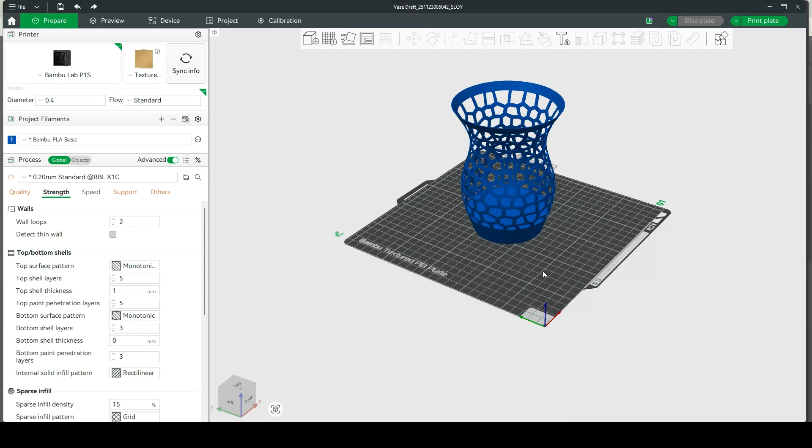In this video, we're going to be talking about Bambu Studio's Make My Vase tool and how you can create something like this in just a matter of minutes. Let's jump right in.

Jumping right in, we're going to head on over to our Home tab and then down to MakerLab. As we get into here, we're going to scroll down and find our Make My Vase. This tool is awesome for creating simple and even some more complex style vases.

Now we have two options. We can either start from a blank or we can even find a template that works for us. We're going to use this create from blank, and we're going to go over some of the features that you're going to need to know as you're getting into this tool.

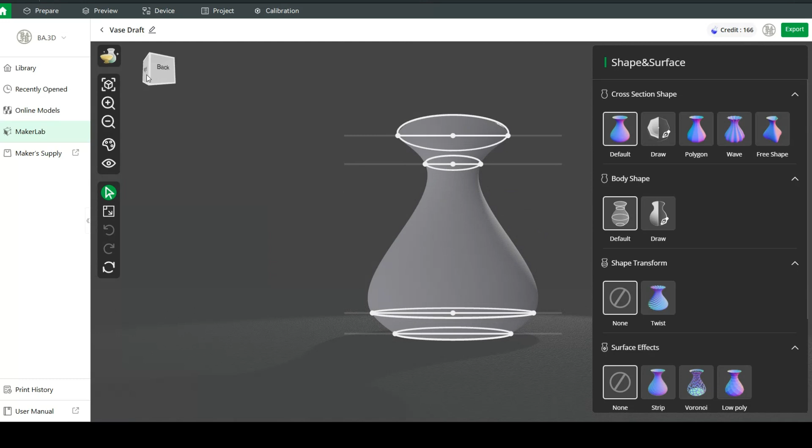So by default, this is what you land in, and we're going to just do a quick preview of the vase that we have here. If you've ever used any design tools, some of this stuff's going to come very natural. If you have not used any tools, then it's going to feel a little clunky at first.

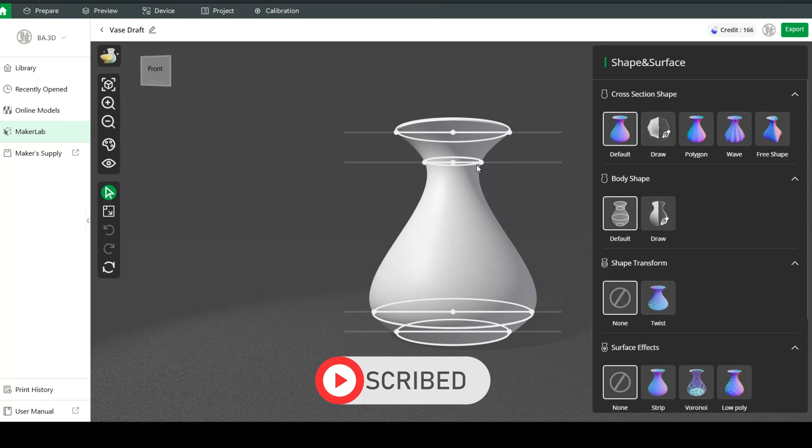As far as the settings go, I like to start by getting the height first. You have the option to expand, and you have the option to contract, and then you can also move these sections up and down. In order to move, you have to just make sure you're on one of the little handles, or else it won't let you just grab here in the middle if you're having that issue.

So we're going to first set the height. I know I want to set this at around 6 inches in height, so I'm going to start at 150 millimeters. I know it's not exact, but in my brain, it's easy just to go by 25s to get it close.

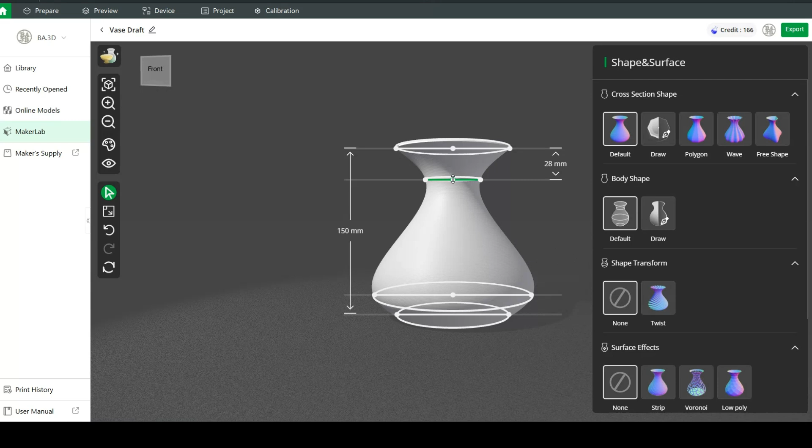Okay, the next thought process here is we need to decide what type of vase we want to create. I like to use these sections here. Draw is if you want to actually draw your own style vase. So we're going to go through each of these.

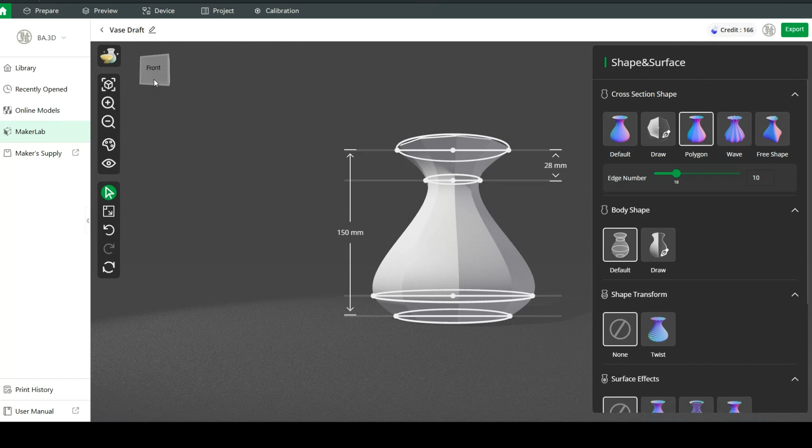So your simple polygon here, that's what it looks like, top, bottom. And you can increase or decrease the number of edges. It's totally up to you.

And then we have a simple wave. This one gives us a few more options in the fact that we can decrease the quantity. You can see I'm on a straight here, and we can increase the amplitude a little bit, and it really stretches them out a long ways. So you can play around with this, build it how you would like.

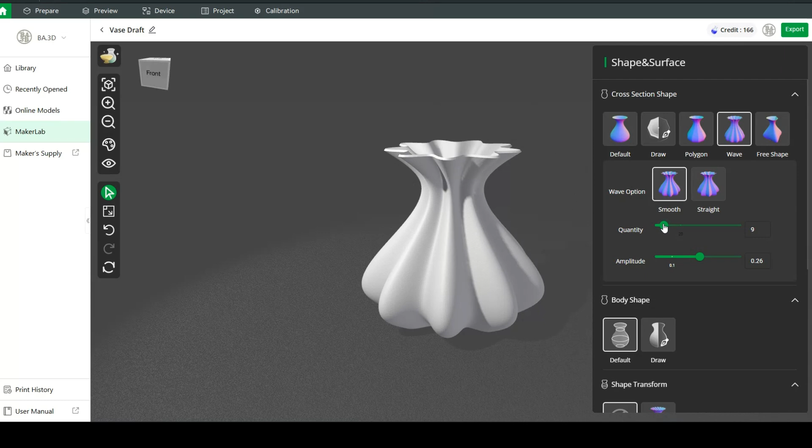There's also the smooth option that you can play around with and really build out some fun stuff. So that's the wave. And then you have the free shape, and the free shape is a little bit of, it's not quite as free as you would like it to be.

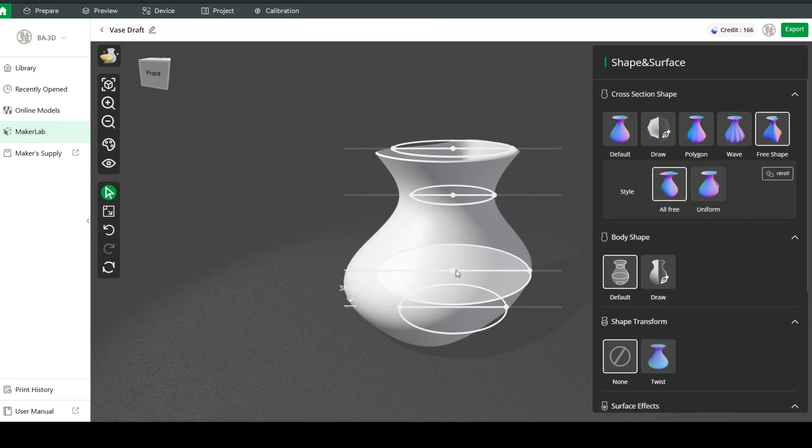So you can stretch some stuff out. You can increase, you can move sections up if you would like them, and then decrease those. And you can kind of work on getting your freeform, but the base shape stays roughly the same as far as it's not quite what you can do.

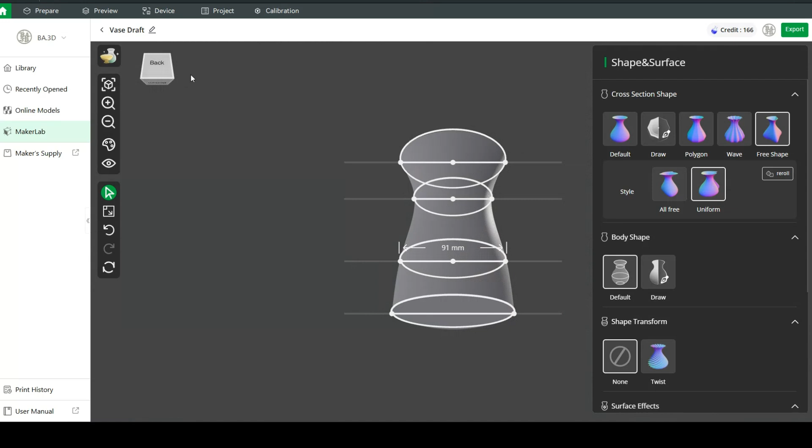There is a uniform option where it's going to kind of keep it together. Haven't had the best luck with that. So just for today's purpose, we're going to go back to the default here, and I'm going to build out just kind of a more simple vase.

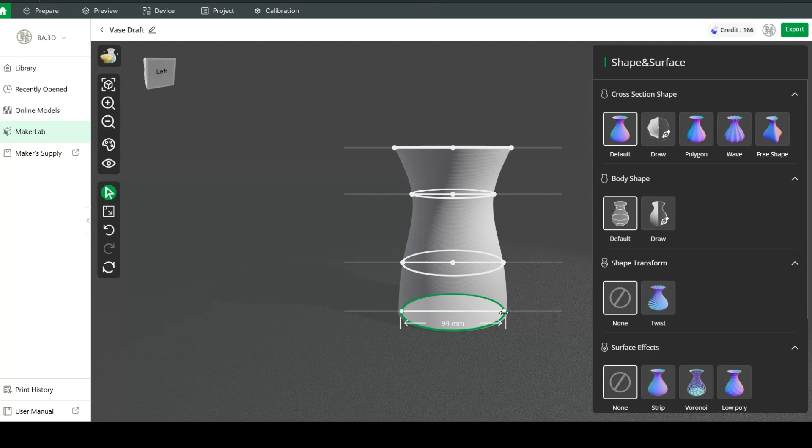It's kind of a slender vase. So the width, I like to go no more than half. So we're going to come down here to 75 just to keep stability of the vase. And I'm going to push this section up just a little bit because I want it to stay fatter longer. I'm going to actually increase this about to 100.

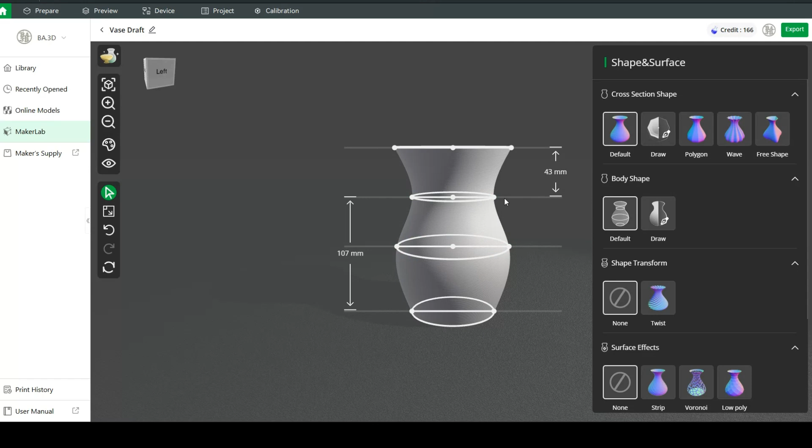And I'm just building a very typical standard vase here. Something like that. And then we're going to flare this top out just a little bit, somewhere in there. Perfect. Okay, so there's the vase.

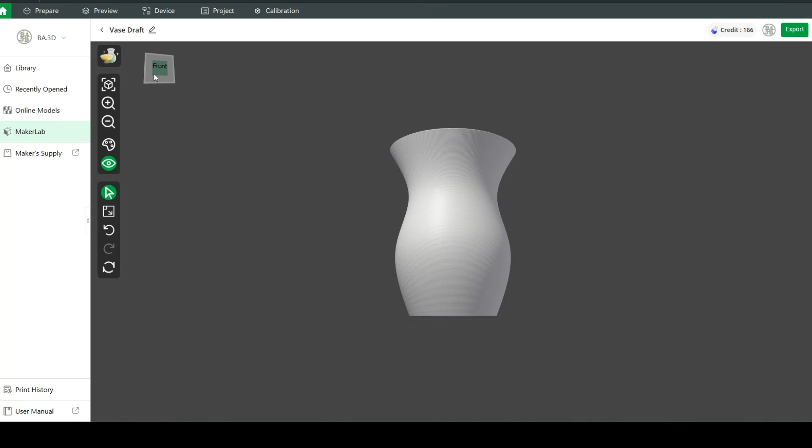Now, if I want to preview this, we have our preview mode over here. And I can say, okay, that looks pretty close to what I'm looking for. Okay, coming back. So let's go back to editing this.

We'll turn this off. Some other options that we have is we do have the option to add a twist. Now, the twist is only going to work if I put it in like a polygon and then do the twist. The standard shape that I had before isn't going to allow for a twist because it was in the default mode.

If I put a twist, I can put as much of a twist in it as I want, and I'm not going to be able to see it. So make sure if you're using this twist that you have one of these other options selected up above.

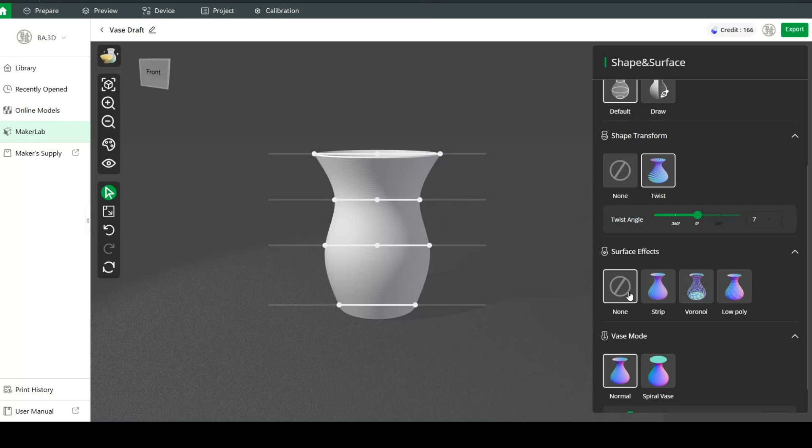Okay, so we're going to keep coming down here. Now there are some basic surface effects that we can add, and so we have just your basic strip, which is a little single, or you can choose a double, which gives you more of like your cross pattern here.

And then we can choose the width that we want them to be. So this is in millimeters. I can make them around 2 millimeters. I can increase the height. We'll try to get this as close to 2 as well.

And then your density is how much of the vase is being filled in. So right now we're at 60. We can decrease that, and it's just going to decrease how much of this vase is actually being filled in.

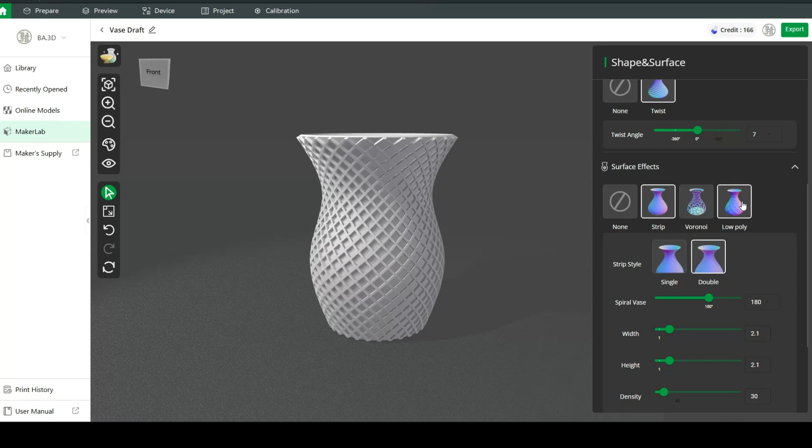So there's option 1. Next option is this low poly option. There's not a lot to do here, just choosing low poly, and it's going to put it in that.

And our third option is the Voronoi, and this has some pretty cool stuff. If you've seen these, this is how most people are creating them. They're not actually jumping into Fusion 360 and creating something like this. So the options here are you always have to have a top ring and you always have to have a bottom, but you can choose whether you want just the top and a very small bottom, or a top and a bottom section with the middle being filled in.

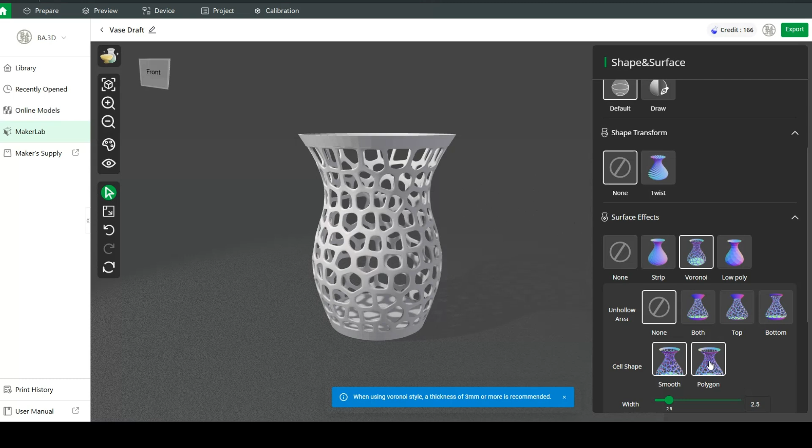If you leave it as none, the default is going to be just a small section at the top and the bottom. Then you have 2 options where you can either go with smooth, which gives rounded corners, or the polygon version, which gives you sharp edges.

The overall width of your section defaults to 2.5. If we were to really bump this up, let's go to 4 maybe. You're going to see how thick these sections get. So this is your width, and then your density.

Again, the more dense I make something versus the less dense I make them, it's totally up to you to decide how you want to build this vase.

So for me, I want this to have a top and a bottom, and I want to keep these fairly small. Maybe we'll go down to 2.5, which I believe is the default. And put our density back to 200, somewhere in here. So this is what I'm feeling for this vase.

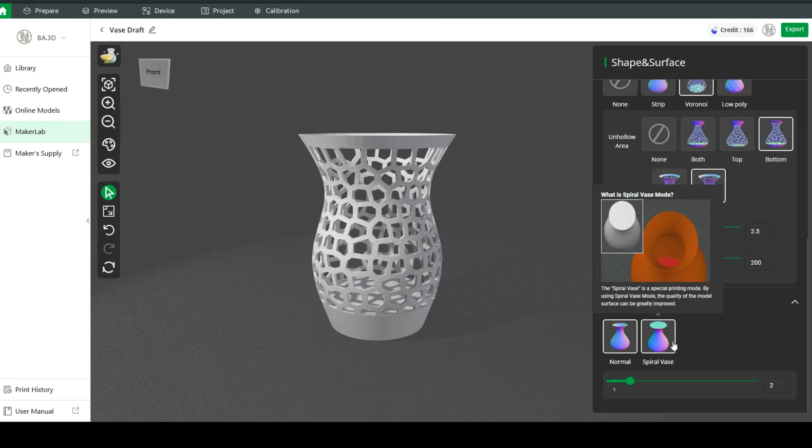Now, there are a couple other things I want to show you really quick. By default, if I want to print something in vase mode, I have this option to select and print it in vase mode. Now, for this particular object, you'll see vase mode doesn't work, but I'm going to show you really quickly. We'll come in and reset our shape to something a little different.

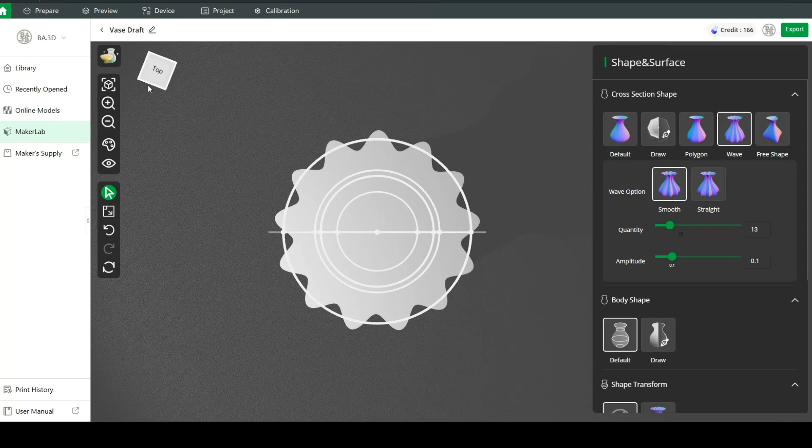We'll go to a wave. We'll drop this down, pull it down quite a bit, make it smooth. And you'll see, hey, we've got our option, but down here we have vase mode, this is to print in vase mode. So when you're printing in vase mode, you need a solid object.

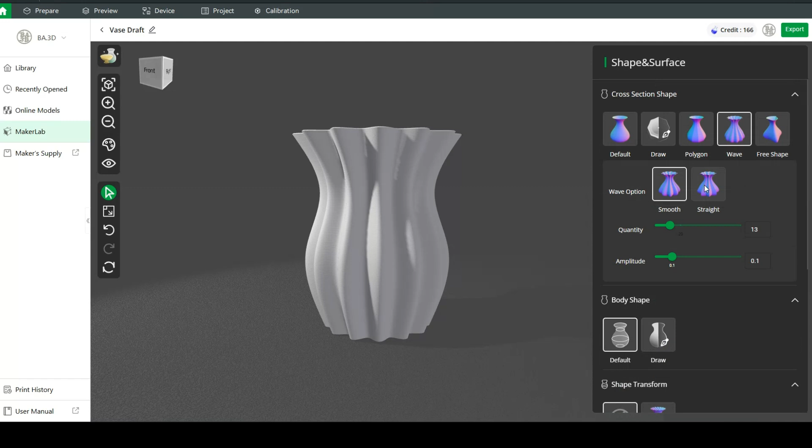So by selecting this vase mode, it will automatically create a solid object for you, with 0 infill and just no top, and it'll allow you to do that. So jumping back over, I'm going to go back to default and build this the way that I wanted it set up, which is nice, it keeps all of your settings. So as you come back and forth, you can use them.

Okay, so I've got this here. The next thing for me to do is a quick preview. Yep, looks great. I'm going to be printing this in blue, so I'm going to change this color just to get an idea of what this is going to look like. Something like this. So it looks great.

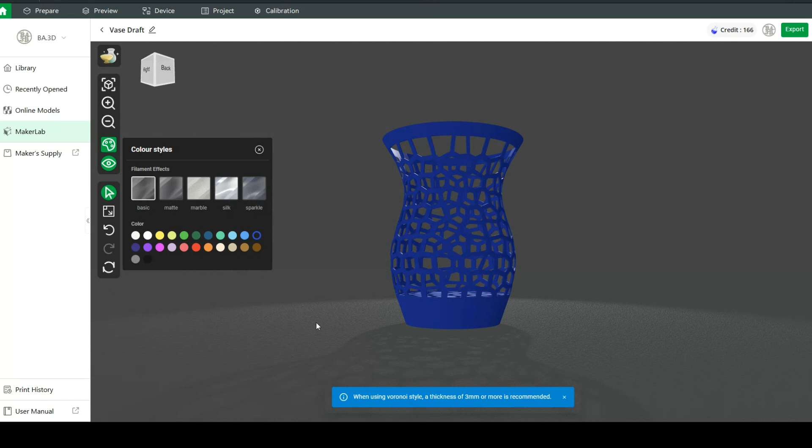So I'm going to go with that. And the next step, super simple, just click export, it's already ready. And I'm just going to say open in Studio, and it will pull it right in for you. So there is what it looks like.

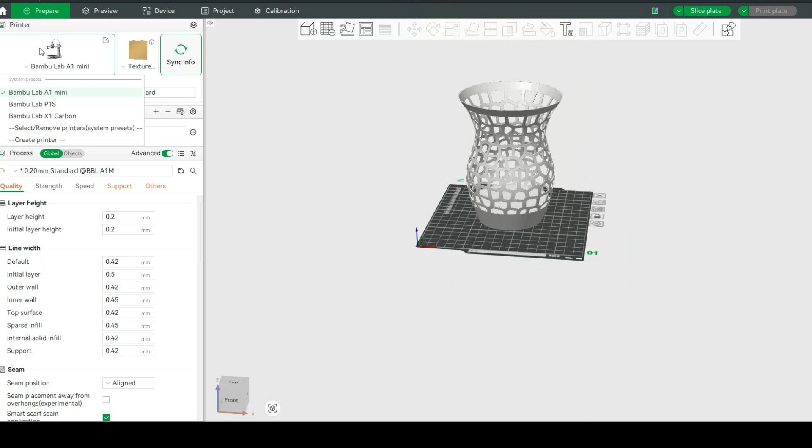So I have got this set on an A1 Mini, which I need to switch down to a P1S. And it's going to come in with your standard settings that come standard. You will need to go and adjust those for your particular print. That's it. At this point, I'm ready to slice this plate.

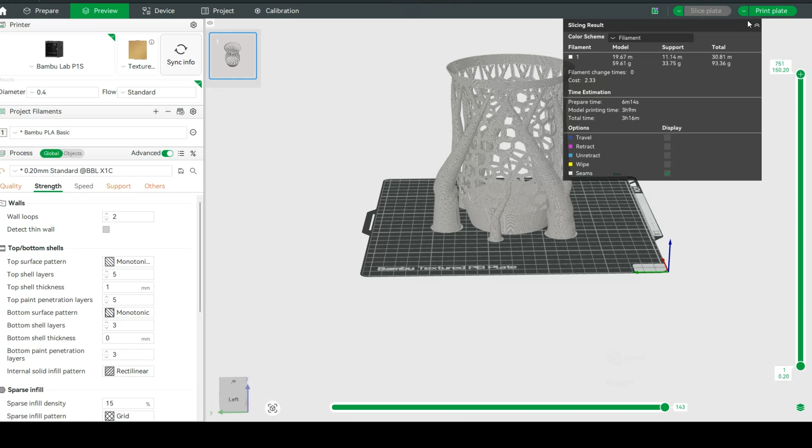Take a look at it. Looks pretty good. Again, I said I was going to be printing it in blue, so we'll select our blue. And should be good to go.

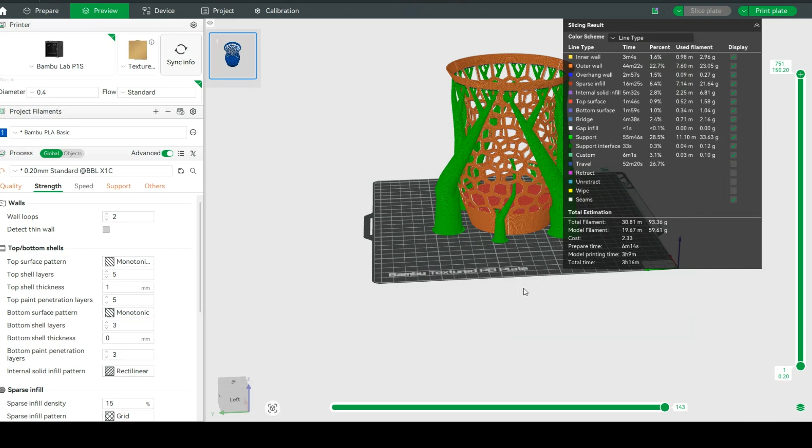Now this print, if we come over here to our line type, this print is going to take about 3 hours and 16 minutes to print. Needs a little bit of support in a few places, mostly just up there at the top. Overall, I think this is going to turn out really nice.